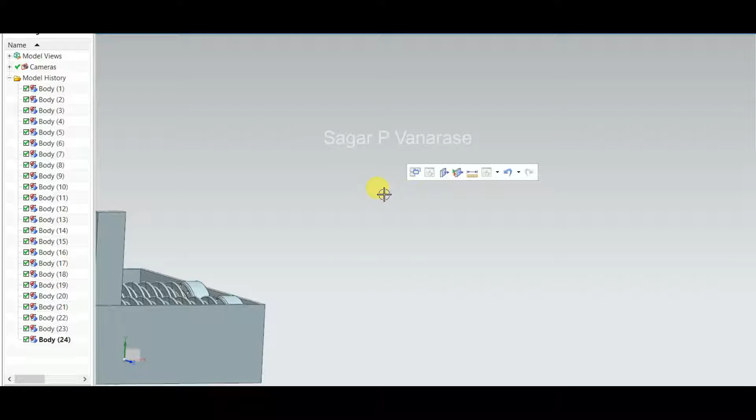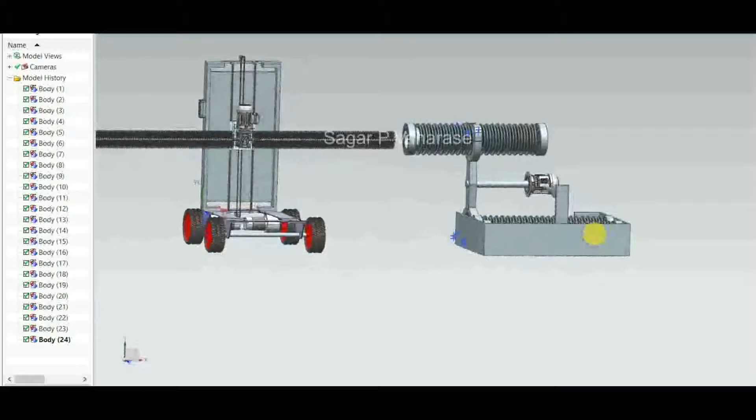It is used to work on, basically made for cleaning the insulator line insulator assembly from the inner part. This is the complete assembly. The brushes are mounted on the rollers with the help of motor and reductor. So here are the components.

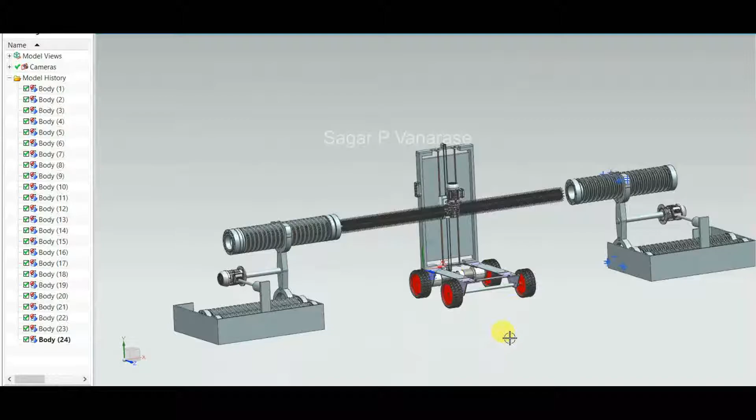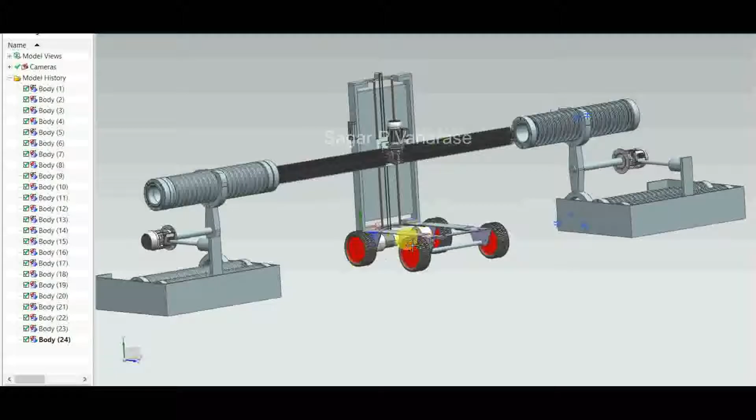The working process will be such that first, the motor is connected to this head, and it is fully automatic with the connection of DC motors on the wheels, the rear wheels of it. These DC motors are connected to the rear wheels, which helps to move the device forward and backward, fully automated and controlled with a control box or remote box.

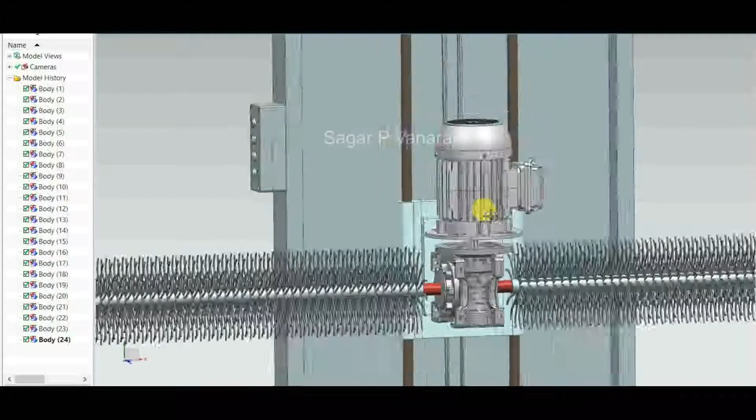For up and down movement, we have connected the motor with the help of two smaller DC motors here. With the help of channels, it can move forward, downward and upward with the help of slide rods and the belt and roller mechanism.

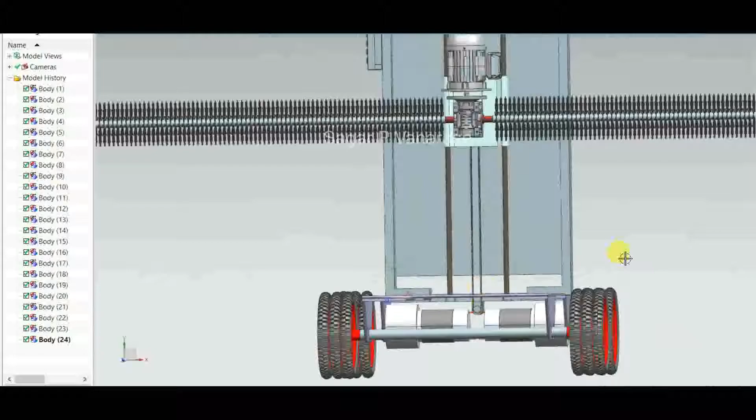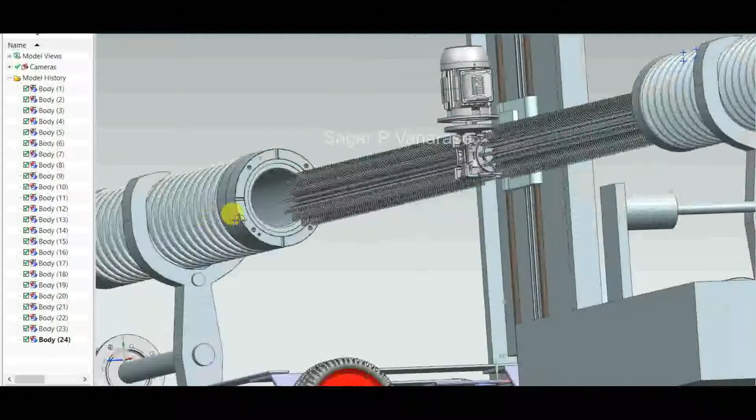Then the second, most important part is it is portable and can be moved from one place to another with the help of wheels. These are the brushes, which will go inside the inner diameter of the insulator and help to clean or remove the foreign materials inside it.

The second portion is we can just move it. It's fully remote and portable. You can move it in each and every corner of your workshop or your industry.

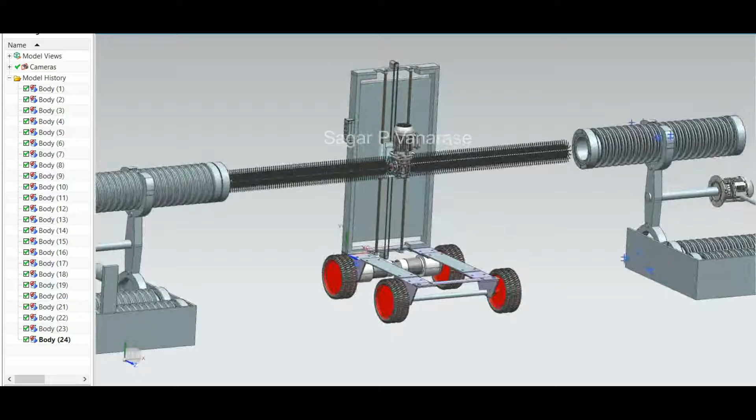Let's take a look. I have tried to design it in the form of woolen threads or plastic brushes which are used to carry out the dust particles or foreign materials from the object.

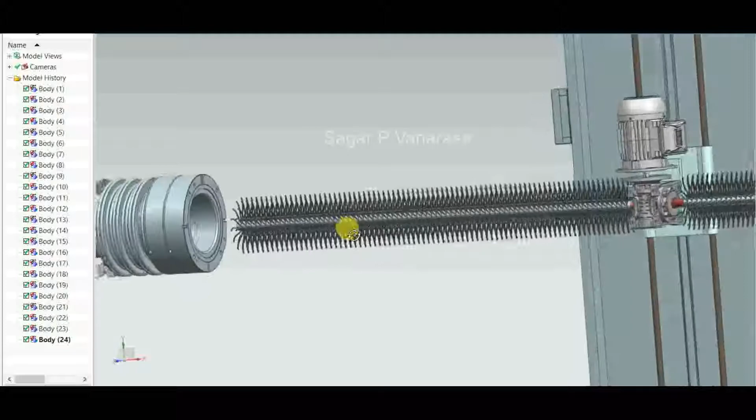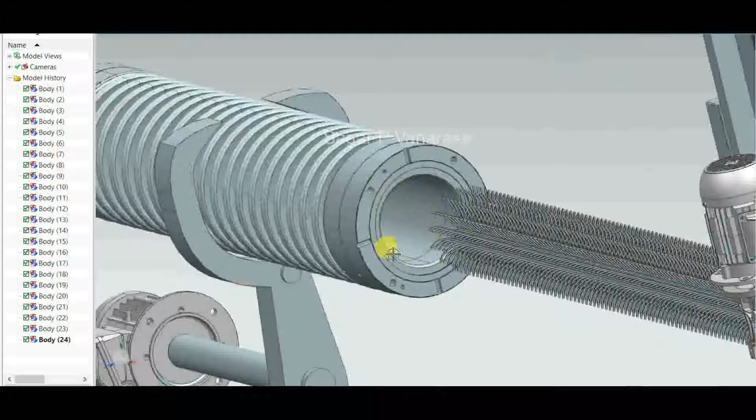This part can be replaced with any other format such as cotton material or a cotton roller as per your requirements, and it can be cleaned throughout this diameter. Also the shaft can be controlled in length as per the requirement of the insulator. I have designed it with the maximum length as per my product.

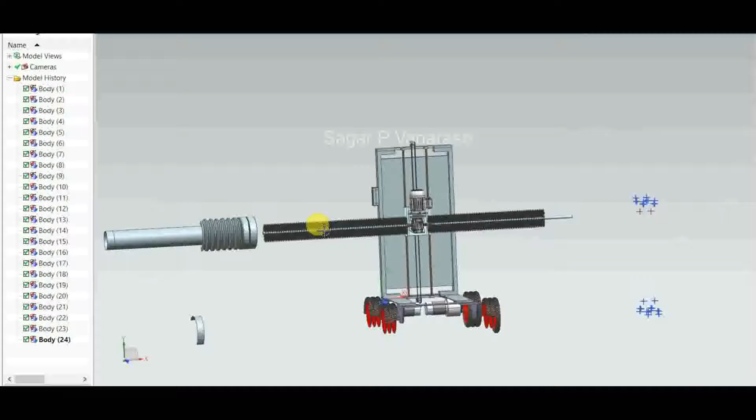So the second most important thing is how to handle this insulator or this product. This product is known as insulator. For the handling system, it is also completely automated.

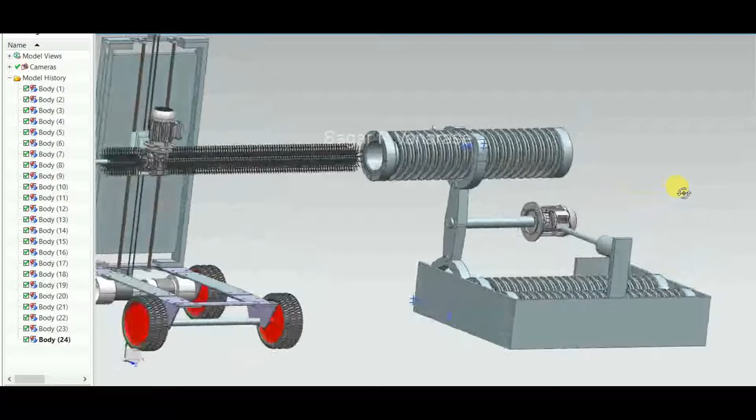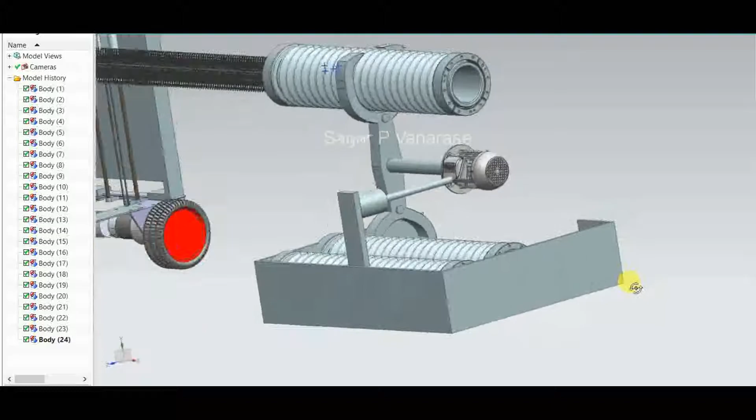I have designed here two robotic jaws, or a robotic arm, we can say. The function of this robotic arm is that these claws will open and it's fully automated. You can control it by a CNC panel or a robotic mechanism, which I will explain here.

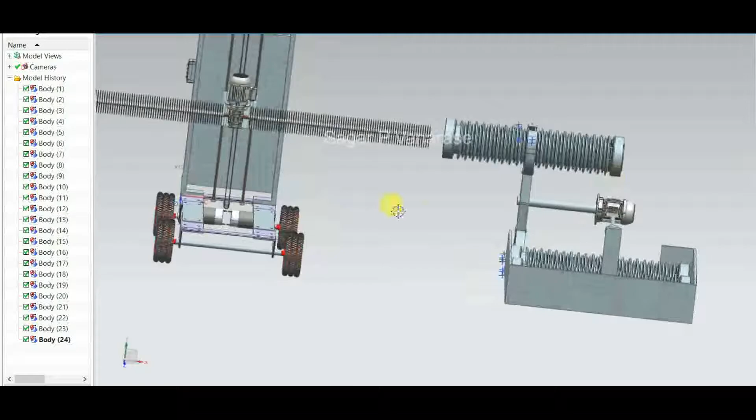It will just pick one product from here and rotate by 270 degrees in the upward direction, and then it will hold it, for plus X and minus X rotation axis, so it can be moved.

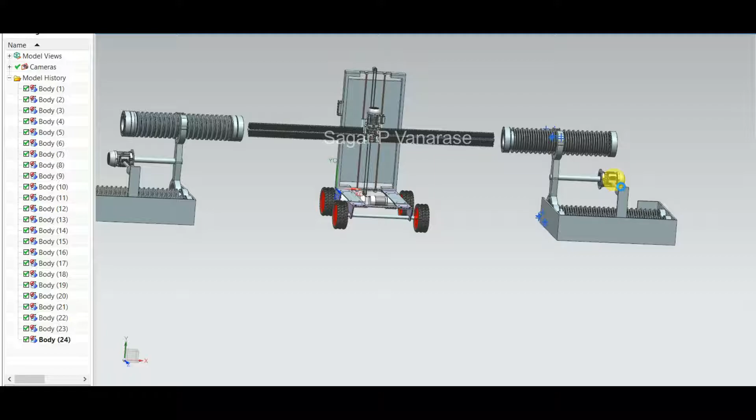I will show it moving. The DC motor will give access to this robotic arm to rotate it 270 degrees upward and 270 degrees downward. So I have selected this component and this component.

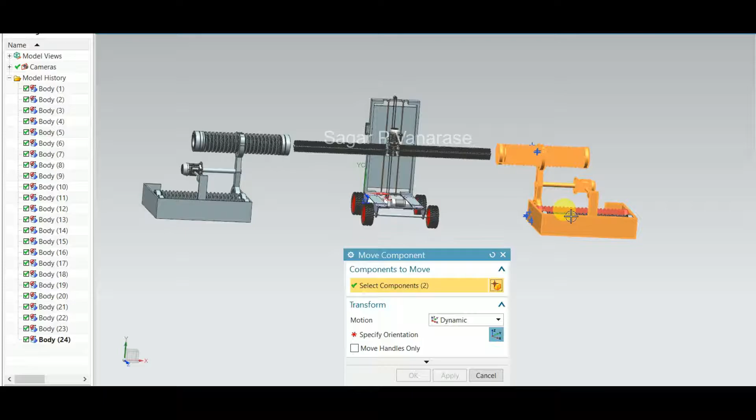By specifying a specific orientation, we can do forward and backward movement, as we can see that forward and backward movement is possible.

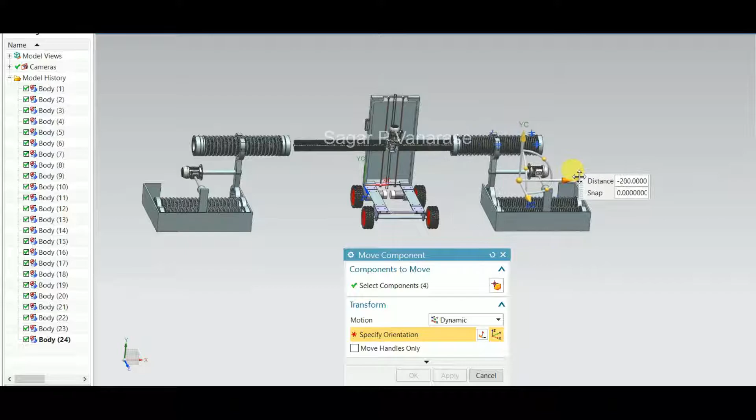The brushes will keep continuously rotating and the insulator's inner portion will be completely cleaned out. The main purpose of this design or prototype is to clean in a fully automatic way, without manual work. Manual attention is also required here to check that the whole system is going in the perfect manner.

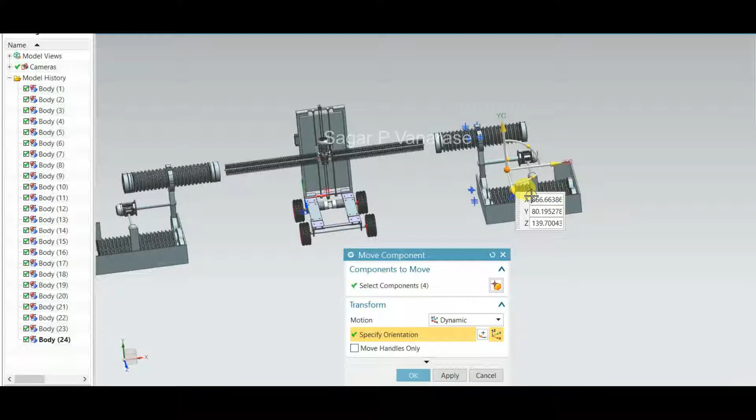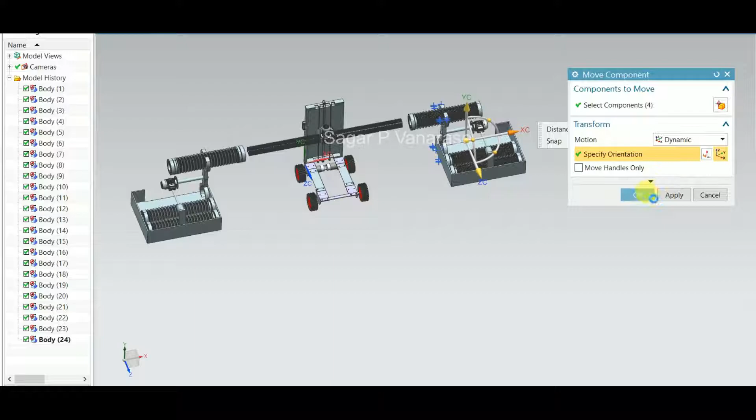The second purpose is to just keep here, or fill this tray or container with another insulator part, so it will move forward and backward direction in such a manner. This is only in one single unidirectional.

I have designed it in the form of a reductor. The role of the reductor is to rotate the single driving shaft into two directions. So the second direction is this one. We will also see the second directional as well.

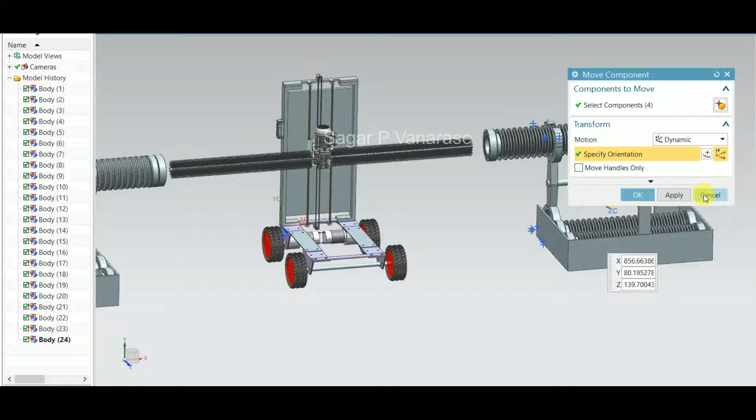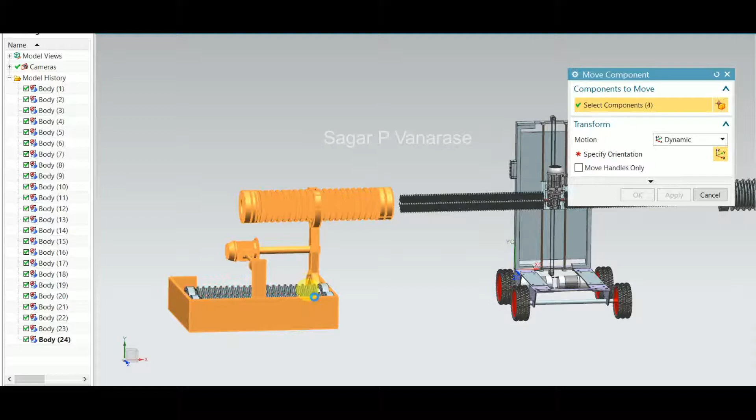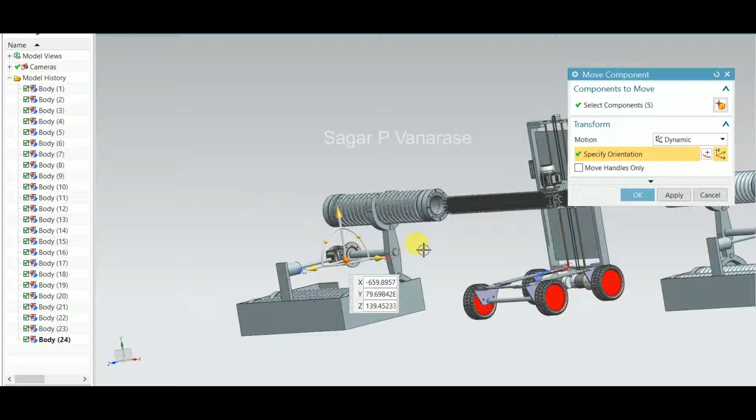From the left side, the bidirectional work can be carried out. Here we are selecting the components, specifying orientation, and in the plus and minus direction the whole mechanism can be carried out in a simple manner to clean properly without manual work, with the help of DC motors and robotic arm mechanism.

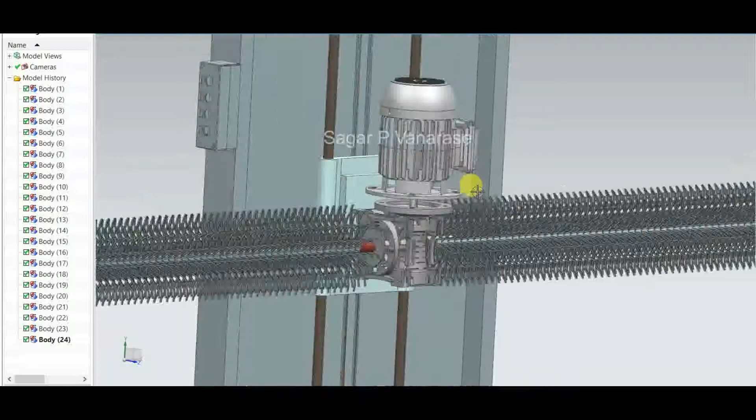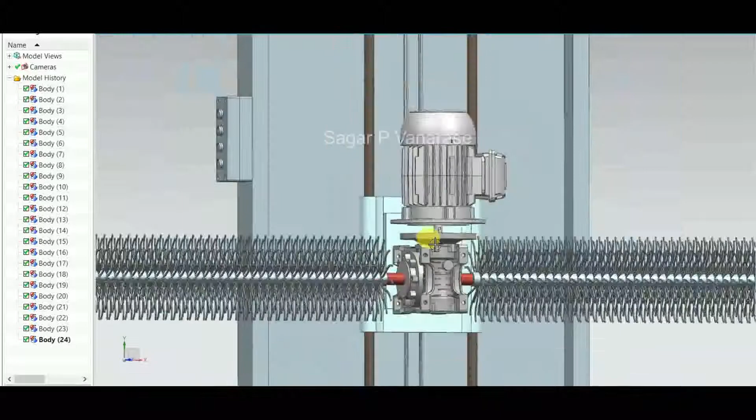The secondary elements, or the most important fact in this mechanism I have designed, is the 1500 RPM DC motor with the reductor. The role of the reductor is to provide the single-way motion driven by the single driving shaft of a DC motor into a bidirectional way.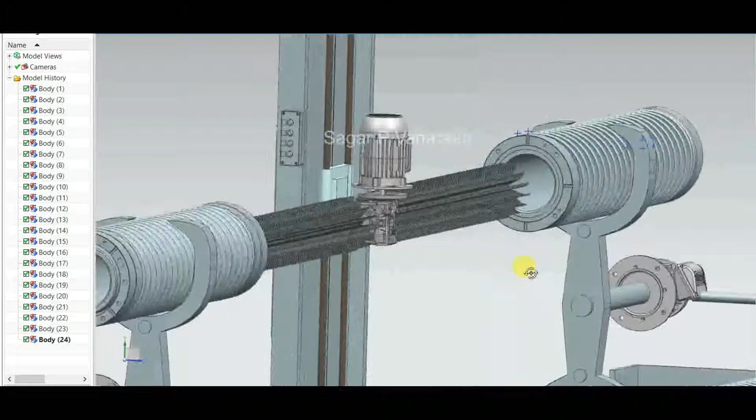So the maximum amount of work can be carried out with a single operation. We only need to pay attention to both directions, but the maximum work can be carried out - that is the motto of our project: to reduce time, maximize production, and carry it out in a proper and safe manner, which will reduce the time and working culture of our working area.

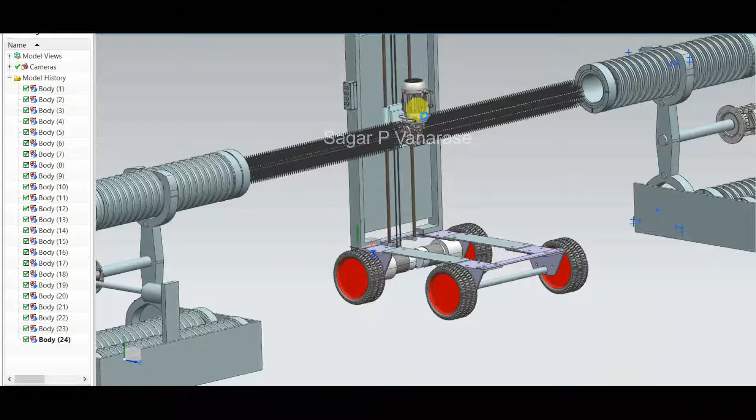So the secondary part is our motor. Here is the motor and the threads, which are the shaft.

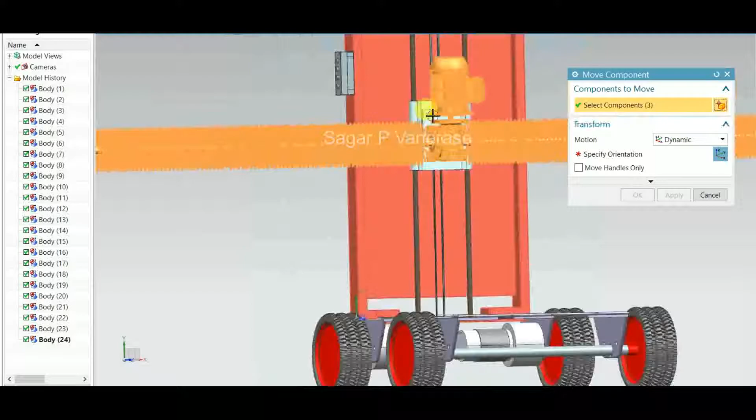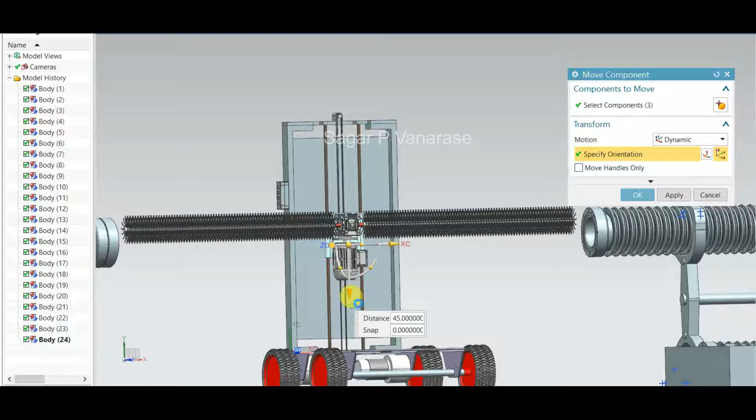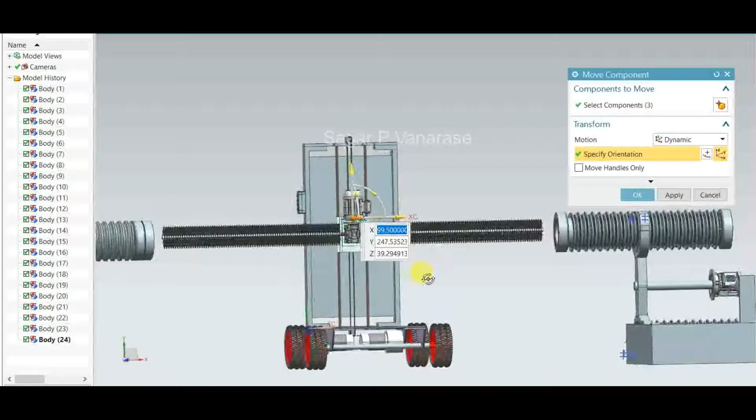This thing is going to move in the plus Y and minus Y direction - so we'll see that, up and down. In such a manner we can do the forward, upward and downward movement of our brush - I mean our motor, reductor, and the cleaning cotton rollers or smaller plastic brush.

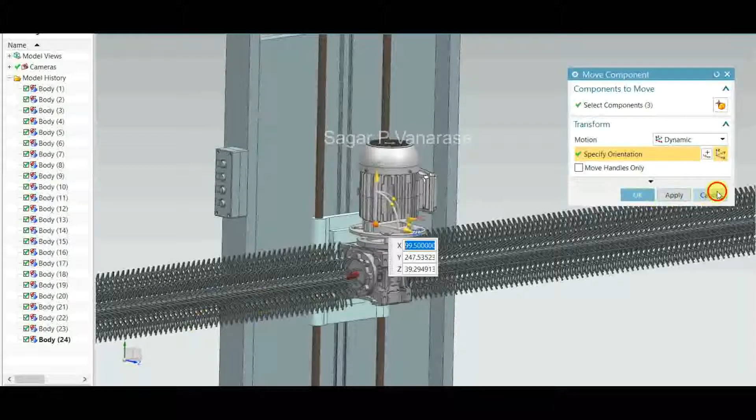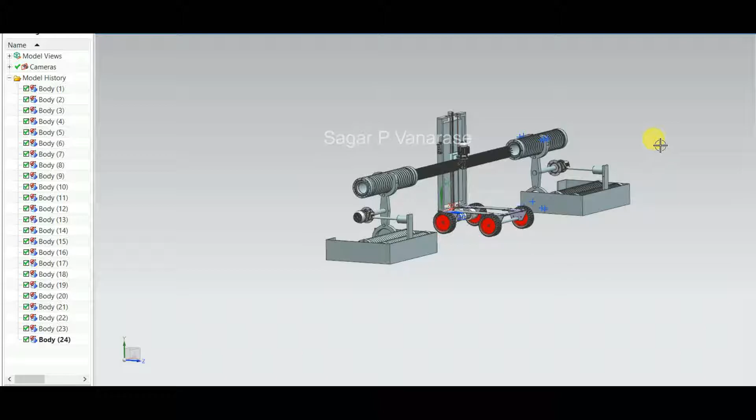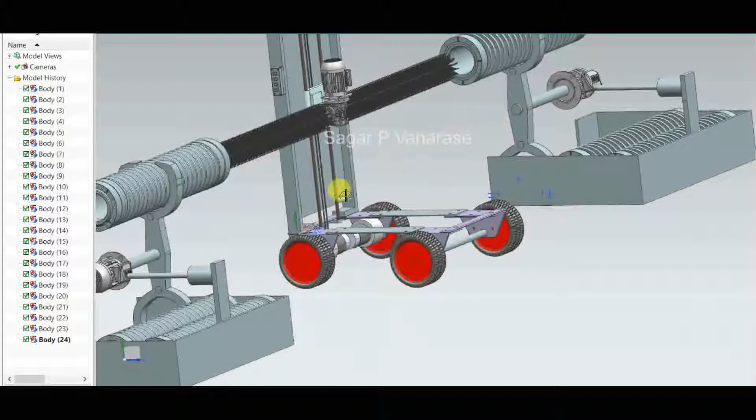So this whole design, or this whole assembly part design, is scaled into smaller numbers. Different parts are scaled to smaller figures. It can be scaled as per our requirement, as per the project work requirement, but for displaying purposes I have used different scales for different products.

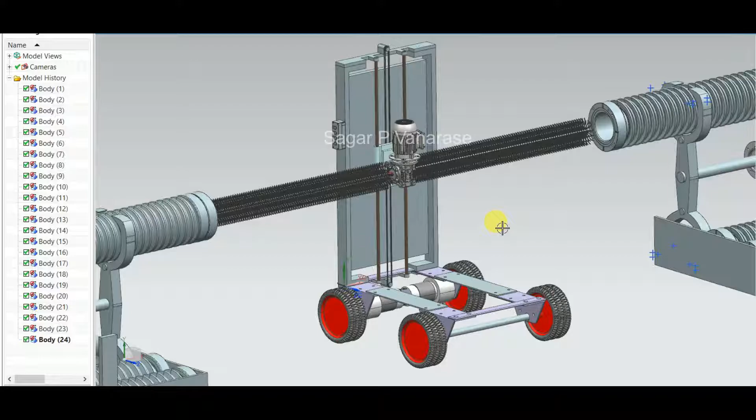The main motto is to simplify the manual work, reduce the manual work, reduce the time, and maximize the production with this mechanism - a completely profitable mechanism which will reduce the working space as well as the working time and working way of the skilled worker. Fewer skills are required; a fully automatic mechanism is provided.

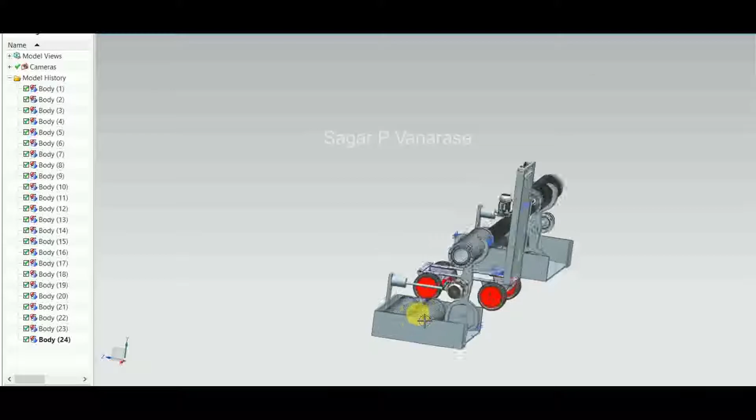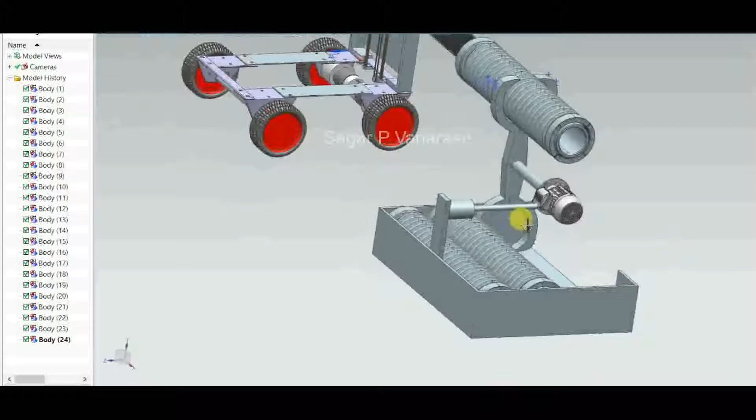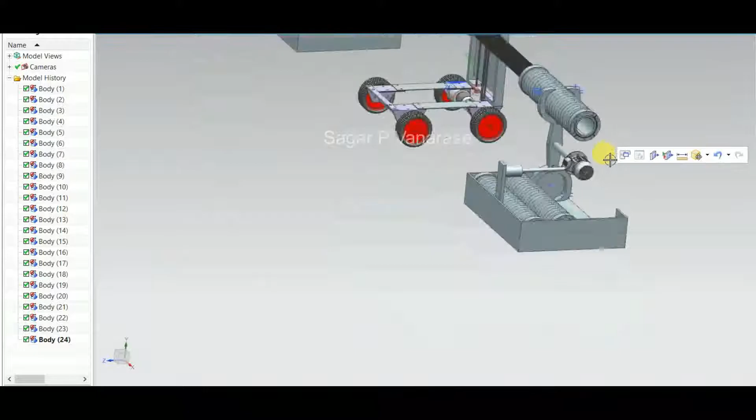So again, one more part I have added here - this is a hydraulic or pneumatic double-acting cylinder, which gives movement as per our requirement. It can be locked and unlocked as per our requirement. It helps move the motor forward and backward with the help of the robotic arm.

So it can be locked and unlocked, or you can do it in a manual way.

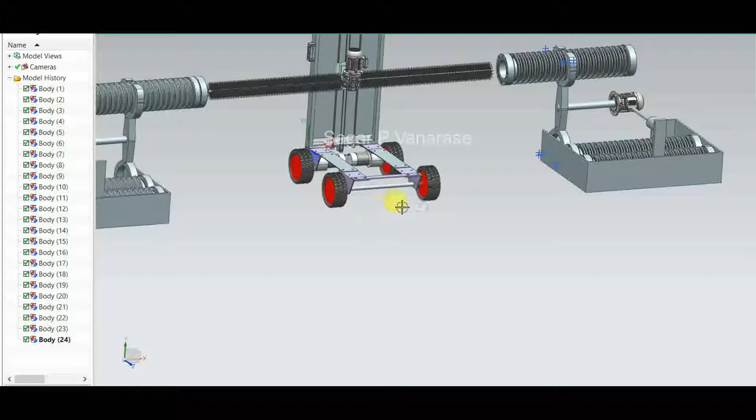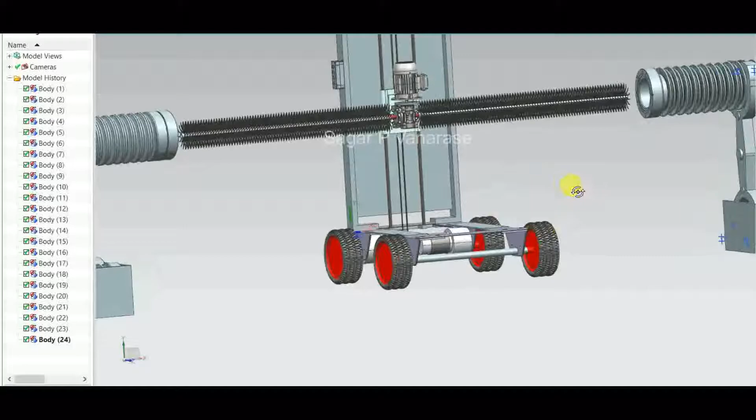So lastly, our time has been reduced by performing such operations using such mechanisms. I hope you will like this prototype and suggest me better solutions. If we want to carry out other programs or mechanisms, it can also be done in a good manner with a control box, DC motors, slide rollers, and completely material handling equipment made easy with such a prototype.